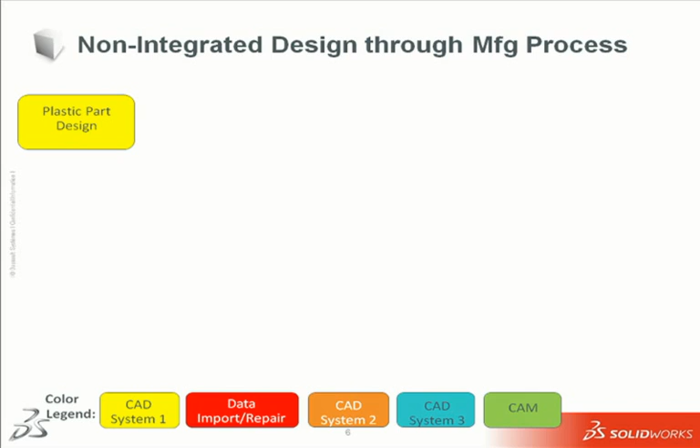So first, let's say we have a certain CAD system. We start off with a plastic part, and then we want to send it to our tooling vendor, or maybe even within our own company we're using a different CAD system to do the mold design portion. So typically what I have to do is export, then import, and probably even repair some of that geometry.

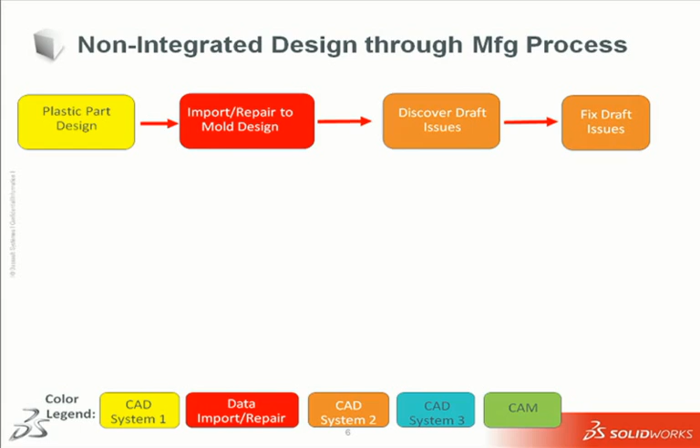That goes into my mold design system, and I find some draft errors there. I maybe fix those draft issues, maybe do some mold inserts. And then when I go to do my drawings, I might actually go to another CAD system, so there again I might export and re-import. And then when I go to CAM, I might go to another CAM system outside of the one I have now.

And you see along the process you have all these red boxes, and these are really places that you're stopping. You have to do something that you really don't want to do: export, import, and sometimes repair your geometry.

So what happens now when a design change comes along? Well, unfortunately, you have to start the whole process over again. You have to import the data into your mold system, import it into your drawing system, import it into your CAM system. This takes a lot of time and creates barriers. Secondly, it puts the accuracy of your geometry in jeopardy. Thirdly, it thwarts concurrent design.

In other words, you're not able to work on the model, work on your NC toolpaths, work on the mold, and work on the drawing all at the same time. Fourth, it's extremely time-consuming. There was a study done a while back by a consulting company that basically said about 70% of the time designing, actually working in the CAD system—in this case the mold design process—people were spending doing this import and repair of data.

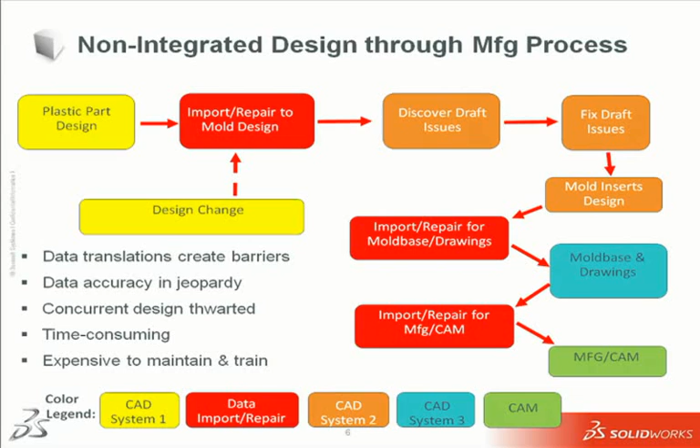So imagine if all your systems could talk to each other seamlessly, how much time you could save. The other thing is it's expensive to maintain and train people on multiple systems. You have maintenance dollars to pay, and you have training to get people up to speed. So that's a big pain also.

So let's look at another way you could do the same design process. I call this the integrated design through manufacturing process.

In this process, you have the same design points: plastic part design, discover draft issues, make the mold, mold inserts, maybe even some analysis, CAM operations, NC toolpaths. But in this situation, all of these phases talk to each other, and there's no need for translation of data.

Data translations are eliminated, which means barriers are eliminated. You don't have to worry about tossing your design over the fence, as they say. Data accuracy is maintained because you don't have to worry about somebody taking your geometry and by accident messing it up a little bit and making a mistake.

Third, concurrent design is promoted. You can be working on your part design while somebody's working on the NC toolpath. You don't have to wait until the design is frozen. I hear that a lot out there: I can't start my NC toolpath until my design is frozen.

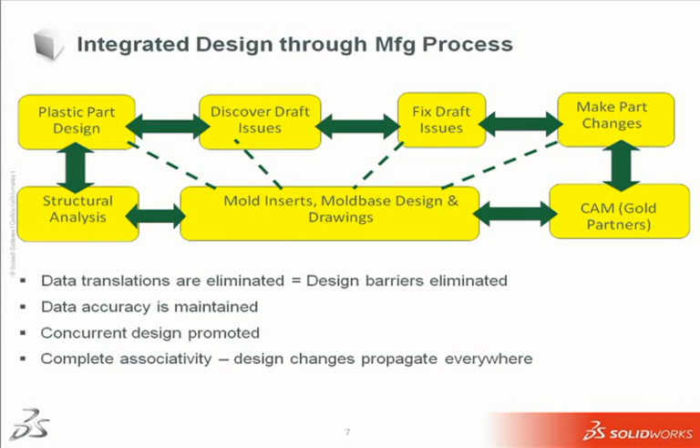The other benefit is complete associativity is maintained everywhere, so you never have to worry about who owns the newest model. Because the design model is the base of everything, it's the master. And if it changes, everything else will update, and changes will propagate everywhere else.

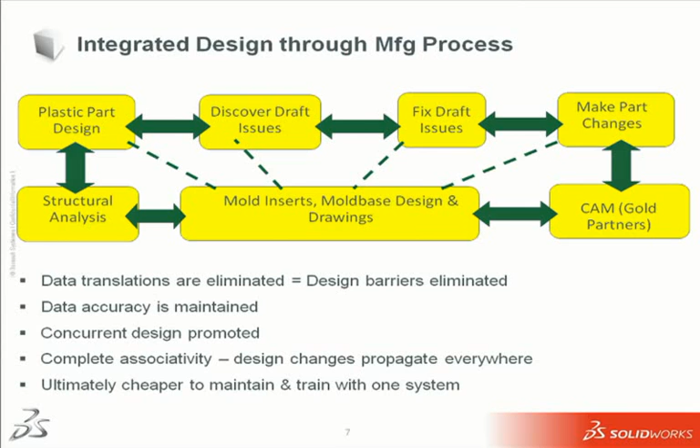Finally, and this is really key for a lot of people, ultimately it's cheaper to maintain and train in one system. You don't have to pay all the maintenance dollars, and it's easier to get people up to speed on one system—or in this case, one CAD system and one CAM system that are fully integrated, which keeps the UI very similar and allows you to transition between the two more easily.

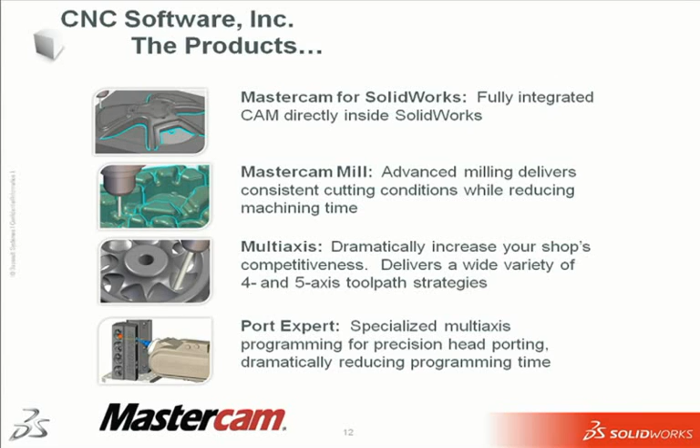Port Expert is a tool that specializes in programming for precision head porting machines.

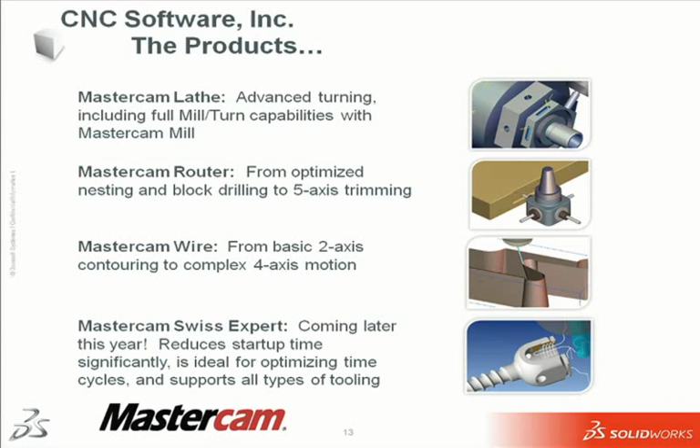We also have MasterCAM Lathe for turning. If you combine that with MasterCAM Mill, you can solve your mill turn needs. MasterCAM Router for woodworking, MasterCAM Wire for your wire needs. And coming soon, we have MasterCAM Swiss Expert for controlling and programming your Swiss CNC machines.

I want to show you two products today, MasterCAM for SolidWorks 2D and MasterCAM for SolidWorks 3D. The 2D version works in both part and assembly mode, contains traditional 2D toolpaths and our more advanced high-speed toolpaths. We also have FBM, or feature-based machining, and those capabilities allow the program to automatically scan your part and identify the features to cut, and then automatically program your part.

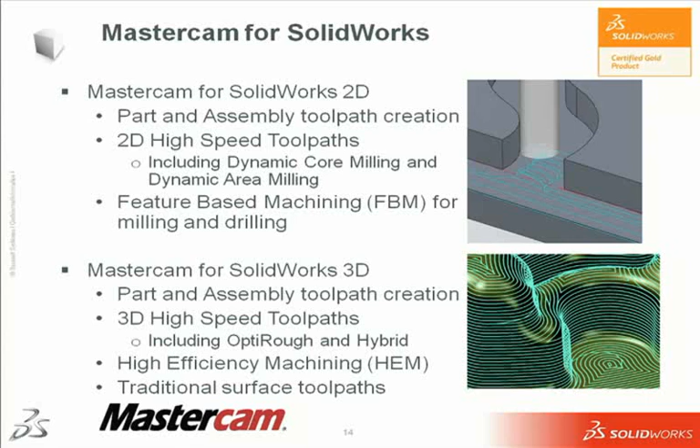The 3D version includes everything in the 2D version, plus our 3D toolpaths. These toolpaths include our traditional toolpaths as well as our high-speed surface toolpaths, including OptiRough, Hybrid, and HEM, and I'll be showing those to you guys shortly.

I want to briefly discuss some of our toolpath technology before we see it in action. One of them that I want to show is OptiRough. It's one of our latest toolpath additions, and instead of using a traditional approach to material removal, where we take...

...a small step down, remove material, and then continue with another small step down, OptiRough takes a large step down, sometimes up to 150% the diameter of your cutter or more, and then uses a dynamic tool motion to remove material. By automatically adjusting the step over, you have a more consistent load on your cutter. Your cutter lasts longer, it cuts deeper, and it removes more material faster.

Once the cutter approaches a tapered wall, our optional step up settings will create smaller steps upward to remove material from the tapered walls. Once that's done, the whole cycle repeats itself. The tool does another large step down, removes material, and then a smaller series of step ups.

Our HEM technology, or high efficiency machining, includes a proprietary speeds and feeds calculator developed by ISCAR. It's a partnership that combines, in my opinion, the best of both worlds. I look at it this way: MasterCAM focuses on creating state-of-the-art toolpath motion, and ISCAR focuses on developing new tools with advanced cutting technologies.

Now with this integration, the two technologies are partnering to work better together. When they're used properly, you can take full advantage of what they were intended for. We often see CAM users that don't take advantage of the full potential of these technologies. With this technology enabled, HEM will dial in a specific spindle speed, matched precisely with an optimal feed rate for what I consider really a no-fail approach to machining. We've just been seeing really great results with it. So I'm going to show that to you as well.

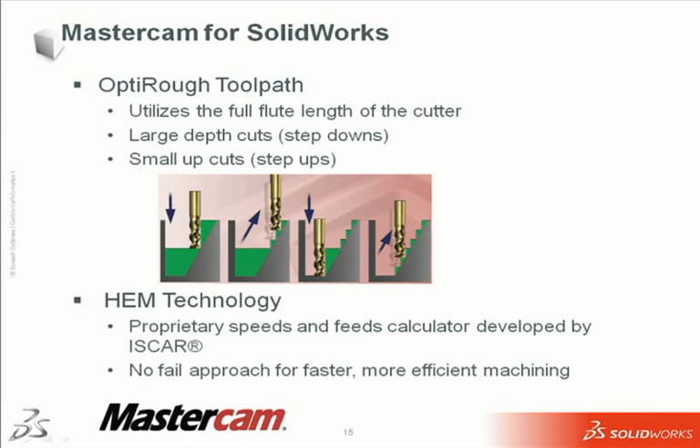Now, Craig, at this point, you want to switch the control over to me?

Okay, let's switch this over. Okay, so it looks like you guys can see my screen now.

I'm going to start with a 2D demo. The first thing I want to do here is create a toolpath called a dynamic core mill toolpath. It's a high-speed toolpath, and this toolpath allows me to enter my part from the outside as opposed to ramping, helixing, or plunging into my part.

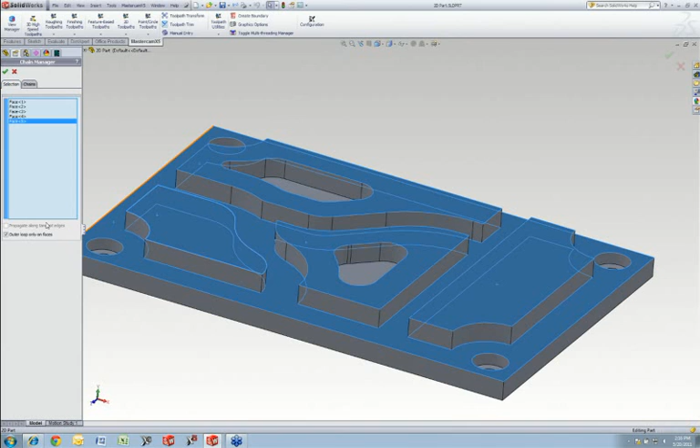I'm just going to go up here and activate one of the toolpaths. I'm going to select the faces that I want to machine as well as the faces that I want to avoid, so I can avoid islands and so forth. The nice thing here is I'm not just limited to selecting solid entities. I can also select surfaces, edges, even sketch geometry for the control of my tools.

I'm going to choose a dynamic core mill toolpath, and I'll just grab a cutter here, 1/4 inch is fine, and I'll accept the defaults. At this time, MasterCAM for SolidWorks will calculate my toolpath, and when I'm done, I can investigate this. Let's zoom out a little bit, and we'll play this to see what it looks like.

Notice how the tool enters from outside and dynamically changes the step over to create a more constant load on the cutter. When it gets into these channels, it again does more of a constant dynamic motion to really optimize your material removal rate. This also utilizes the entire flute length of the cutter, and it extends the tool life greatly.

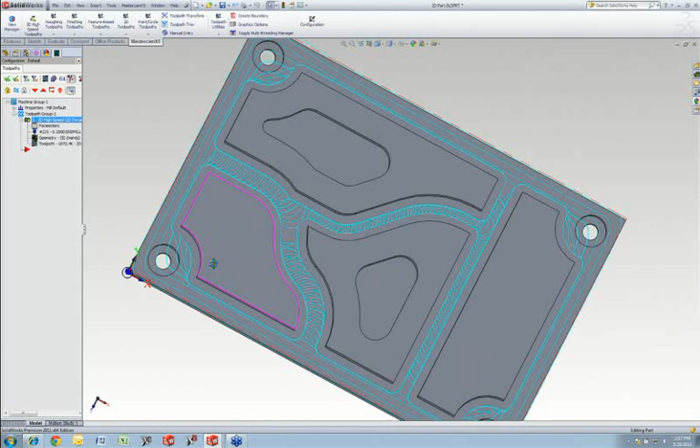One key thing to mention: everybody sees the screen, and you notice you're inside SolidWorks right now. That's one of the key things, the fact that we're running MasterCAM for SolidWorks, not just MasterCAM. Keith has full access to all the SolidWorks capabilities as well as the MasterCAM for SolidWorks capabilities.

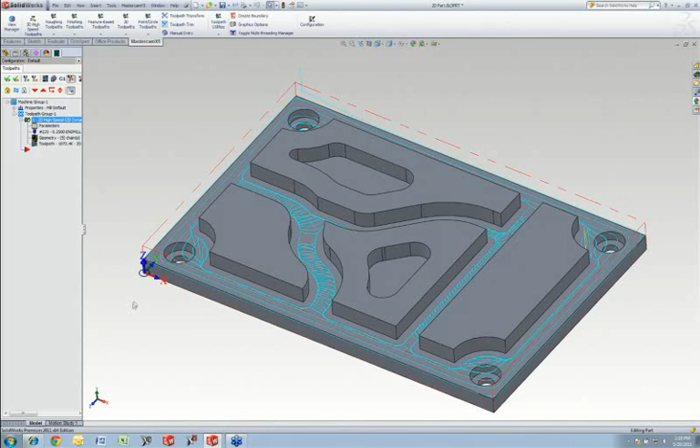That brings up a good point. The toolpaths are not specific toolpaths we've developed for SolidWorks. They are 27, 28 years of proven toolpath technology inside of MasterCAM that has now been able to be accessed through SolidWorks.

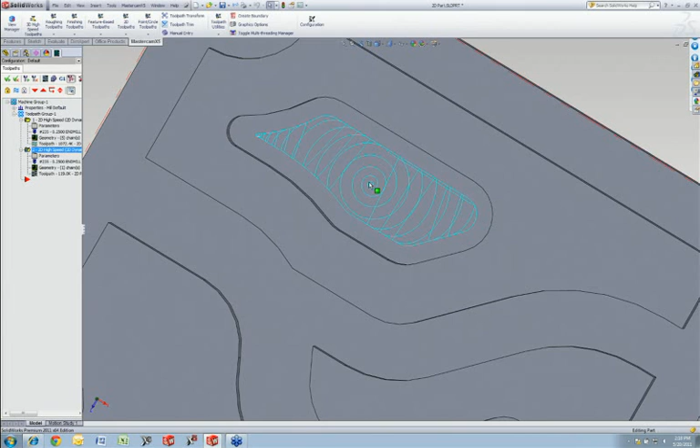So if I wanted to continue, maybe I want to machine out this little island up here, I'm going to use another toolpath called an area mill toolpath. I select the geometry I want to cut, choose the type of toolpath I want, click OK, and within a short amount of time it's done. Notice, again, we don't have our traditional zigzag back and forth type of tool motion. We have this dynamic motion, which allows me to cut deeper and faster with my cutter.

Now, if I have a similar piece of geometry, let's say this island over here, I can just take an existing toolpath that seems to work well, copy it, paste it, and then associate new geometry with it. I look at it this way: if you program the geometry and it works, keep it, just apply it to new geometry. So within just a couple of clicks, I copied the toolpath and applied new geometry to it.

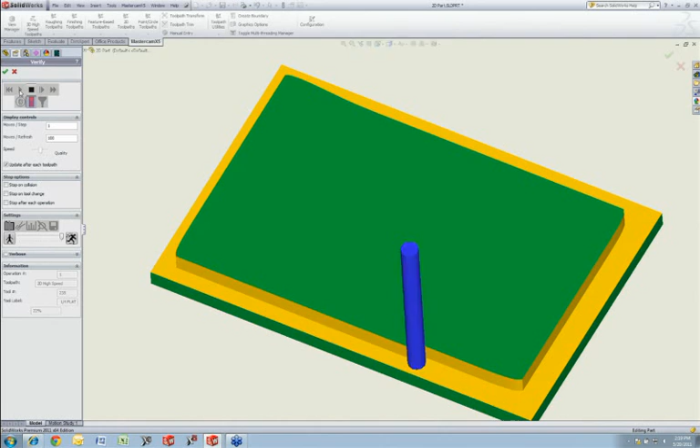At this point, what I want to do is turn on what's called verify. In this case, it'll allow me to check this model out and see how it's going to be cut. A really useful feature that brings the power of SolidWorks into the CAM world is my ability to compare my machined model in MasterCAM for SolidWorks to the digitally designed part that exists in SolidWorks.

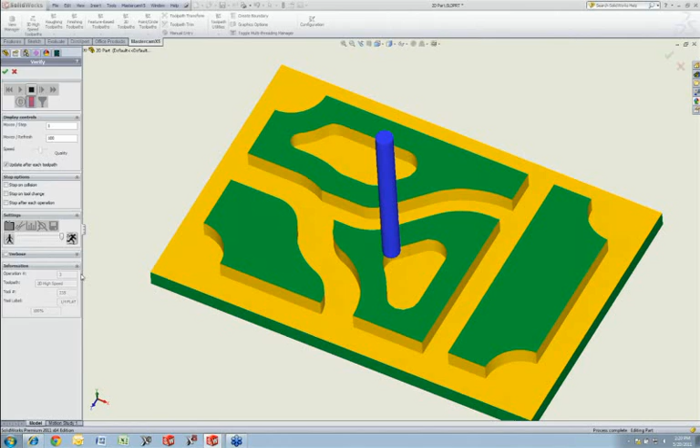Once this is done, I can choose this option to compare my machined model with the SolidWorks model, and I see a color code here. This is basically a color mapping to show how much material I'm leaving. In this case, we can see my machined model here, we can see my CAD model here, and then I can see an overlap of both. You'll see in the upper corner I have a blue area, which means I missed material there, probably because I used a larger cutter and couldn't get into that smaller area.

That brings up a good point. I can use the tools available inside SolidWorks to check for any minimum radius of curvature. A tool I use all the time is my check entity tool. I just choose the option to select the minimum radius of curvature, hit check. It identifies where the minimum radius is, and when I select it, it points out exactly to that area, showing me that my minimum radius of curvature is about 100 thousandths. So my quarter-inch cutter could not fit in there.

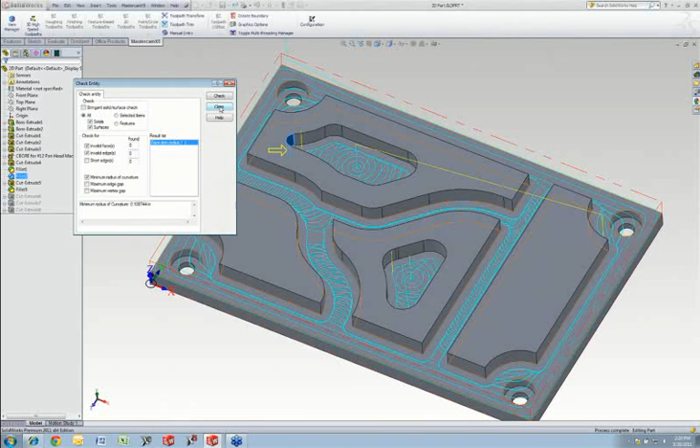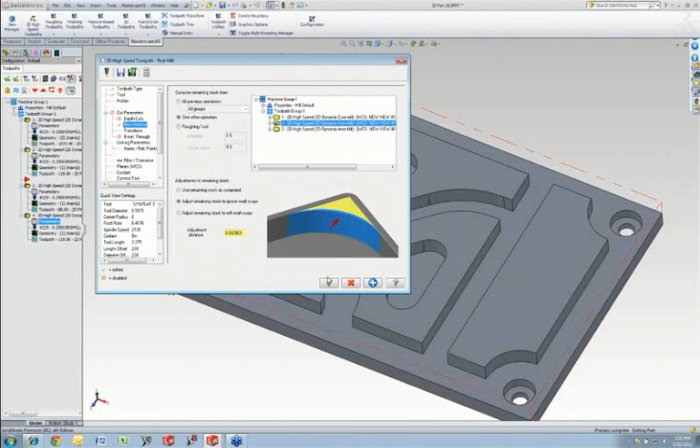So what I can do back inside MasterCAM for SolidWorks is take that toolpath that went into that area, copy it, and do a rest machining operation or rest milling operation on it. By copying that operation, I'm going to choose a rest mill toolpath instead, and I'll choose a smaller tool, in this case maybe a 3/16. Then under another parameter, I can tell it to look at a previous operation, and it'll calculate what material that previous operation missed. Now this new toolpath will only machine that remaining material that was left behind.

So what we can see here, if I zoom into this area, we have just a simple little tool motion that cleans out that area. I could also use dynamic rest milling instead if I wanted a more dynamic approach to it. A lot of that would also depend on the type of material I'm using.

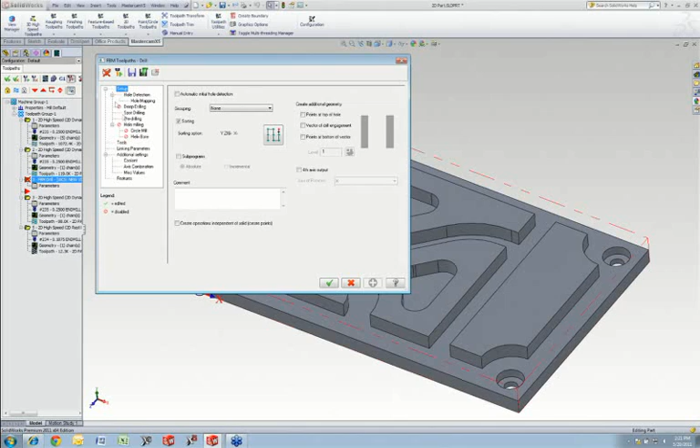Let's finish up this part. We'll drill out the holes. In that case, I'm going to use FBM, feature-based machining, specifically the drill capabilities of it. What that allows me to do is have FBM analyze my model, look for islands, pockets, holes, anything I can machine, and automatically apply toolpaths to that based on some rules that I give it.

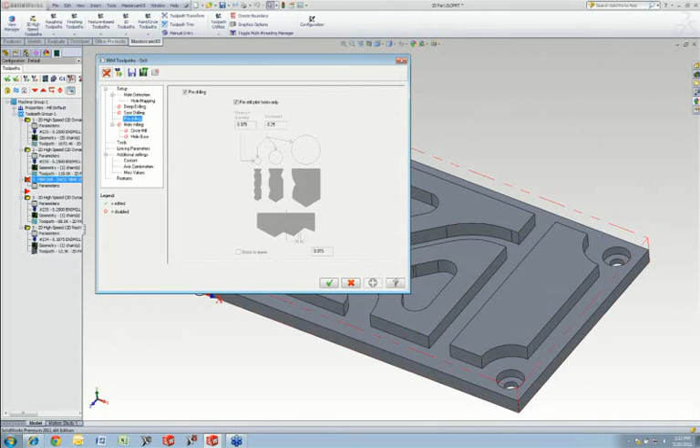Let me turn off spot drilling. I don't need that, I'll just do some pre-drilling. I can also just tell SolidWorks to detect the holes. What it will do is identify any hole wizard features that I have, and with those hole wizard features, it'll actually grab the intelligence of that feature. If it was a 1/4-20 tapped hole, it'll identify it in FBM and allow me to automatically program that with the appropriate size drill. So I just click OK, and I have my drill toolpath already created.

When I hit play here, let me speed it up a little bit. It goes through and machines all these holes out automatically.

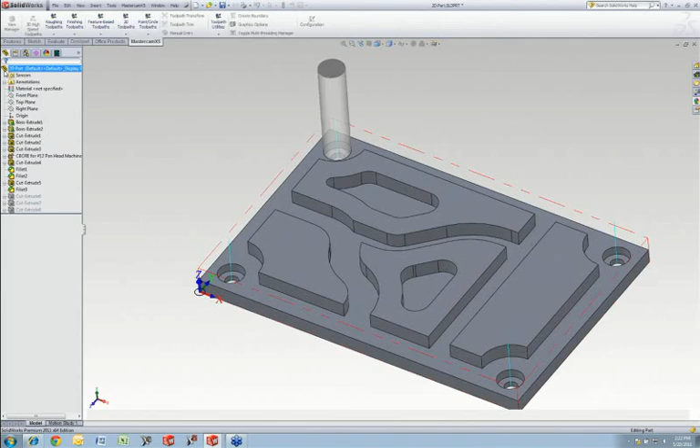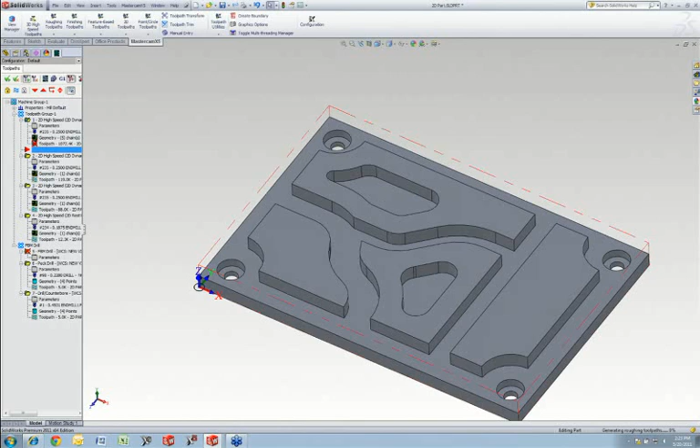Just to take this one last step before we move on, let's throw a simple design change at this. We have a channel here. I'm going to change the location of this channel. Right now it's 1 1/4 inches off the wall, I'll change it to 1.4 inches and rebuild my model. So what MasterCAM for SolidWorks will do is identify the geometry affected by this design change and mark my toolpath dirty. Any toolpath affected by that design change will be marked dirty, and all I have to do is regenerate my model, and my toolpath automatically gets updated.

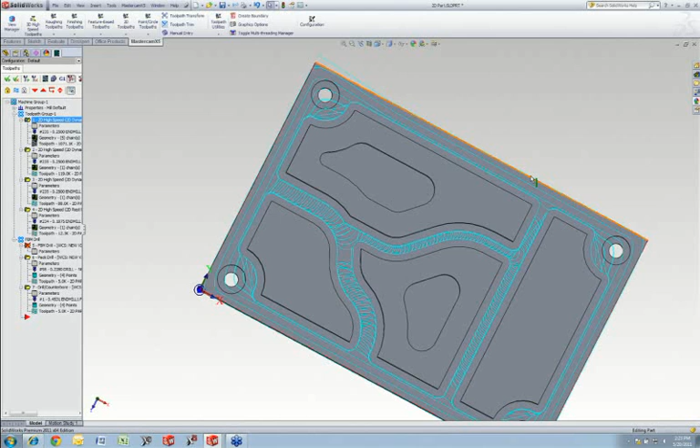So even though this was a pretty simple example, and we'll get into a more complex one in a minute, this is really key. With the benefits of an integrated CAD/CAM system like Mastercam for SolidWorks, your design change doesn't stop you in your tracks. And I think Dan is going to allude to this a little more when he talks in a few minutes.

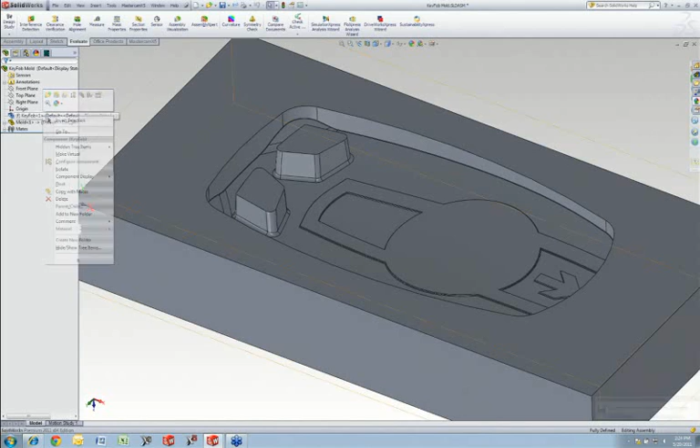So let me switch to another model here. This one's a little more advanced. In this case, I have an assembly. A unique thing with Mastercam for SolidWorks is the ability to program in the part mode or the assembly mode. In this case, this is an assembly, it's a mold, and if I isolate the parts, which the isolate command is a function I love, it's great. This is the model that my mold was created from - it's just a key fob for a car ignition.

Let me jump back out of isolation mode, and I'm going to open up this model in its own window - the mold model. You'll notice I already have some toolpaths on it, just to save time, but I want to go through and look at these specifically. This first toolpath is an OptiRough toolpath.

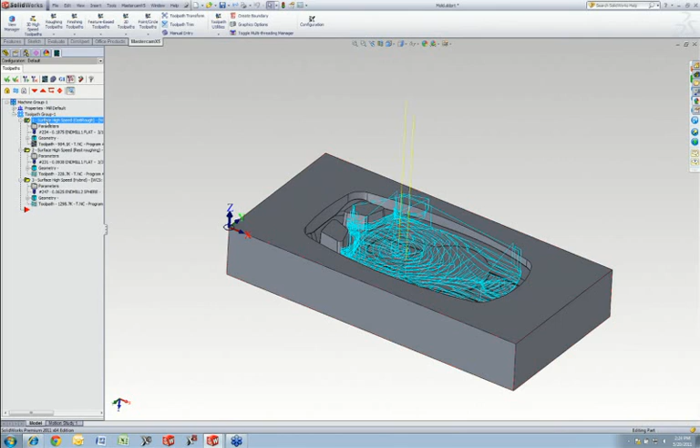I alluded to that earlier - the OptiRough toolpath allows me to do large step downs and then smaller step ups. If I go into the parameters of my OptiRough toolpath, you'll notice I have a step over option, a step down option, and an optional step up command. Right now I'm doing about 55% of my cutter in depth, and really that's just because this is a fairly small part and I want to see multiple depth cuts. But I could, in some material, go up to 150% or more.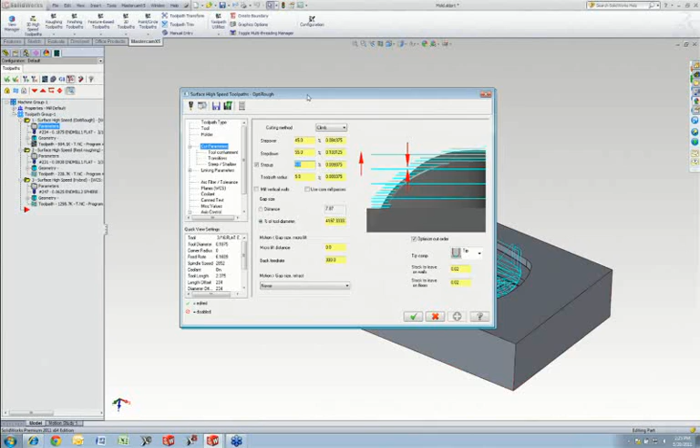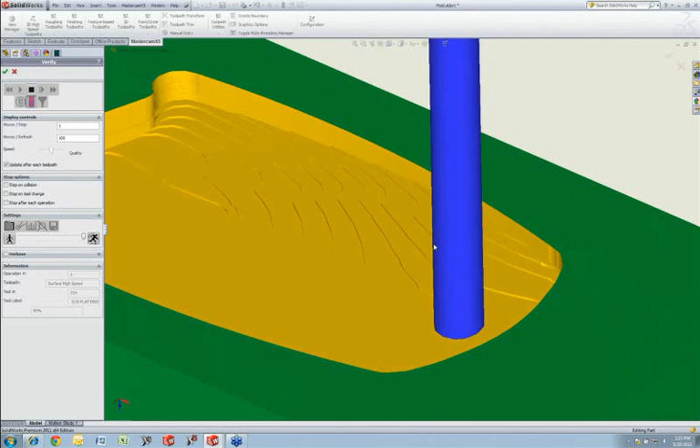So if we go in and do a solid verification of this, we'll see that my cutter removes as much material as possible and then does optional step-ups, which is key. If I zoom in here, you'll see it does optional step-ups in the areas where there's a tapered wall. If I wanted to use a more traditional machining approach, I would be doing Z-level cutting at every step down - every little flat area you see there, I would be removing material.

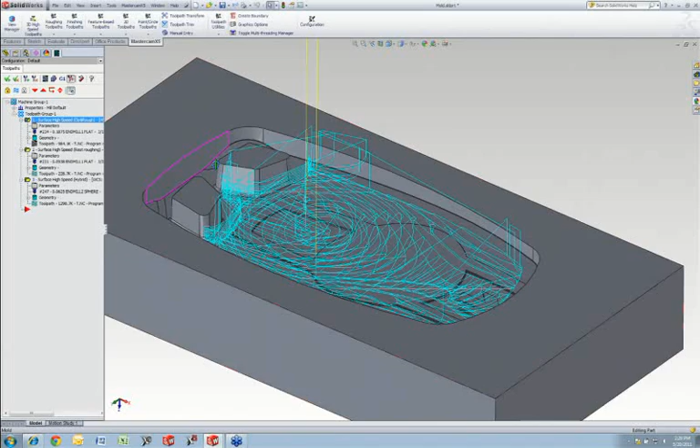Okay, so that was the first toolpath called OptiRough. Moving on to the second one - let's back up a little bit. You'll notice with the first one, I missed material over here, most likely because my cutter couldn't fit there. So using the benefits of a solid model and the power of MasterCAM, I can create a high-speed rest roughing toolpath, which allows me to remove material that previous toolpaths simply missed.

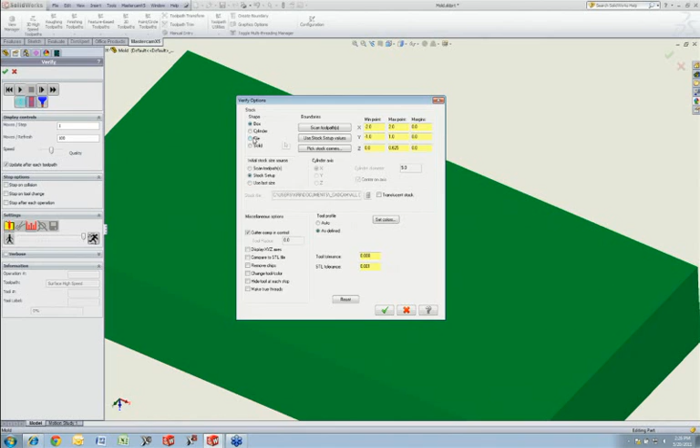Let me turn off that compare option, we don't need that anymore. I'm just going to bring up a stock so we can see a better example of this. If I play this, you'll see this cutter is only removing material that the previous toolpath missed. In this case I'm cutting very little air - I'm just attacking the material that's remaining.

And then the third toolpath I wanted to show here is our hybrid toolpath, and this is probably one of my best toolpaths. It's a combination of two toolpaths - a waterline or constant Z-level machine toolpath and a constant scallop toolpath.

So a waterline toolpath is great in vertical or near vertical walls. But on a more flat area, that waterline toolpath loses its power because now you have large step downs in an area where you really need to minimize the step down. So at that point, the intelligence of our toolpath automatically switches between waterline and constant scallop toolpath.

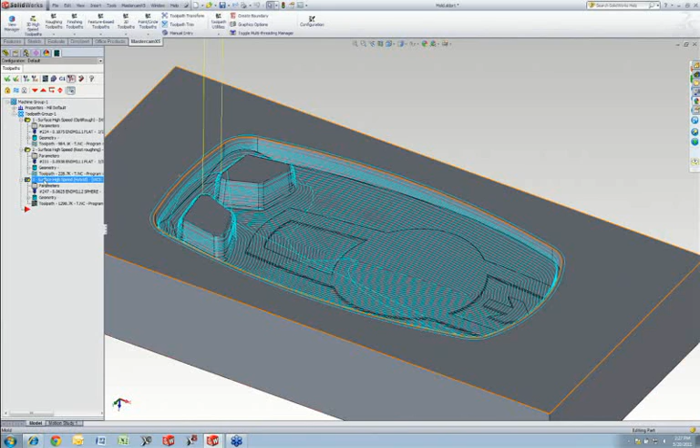And we can see this. If we go into my verify again, I'm just going to change my stock so we can look at a better example of it here. We'll see that, let me slow this down just a little bit.

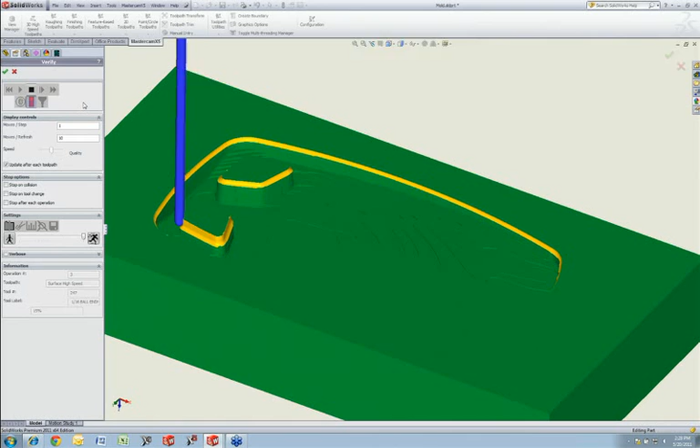We'll see that we'll do constant Z-level machining or waterline machining around the vertical walls. But then as it slowly starts to taper towards the center of this model, it's going to actually convert over to a constant scallop toolpath. Maybe this was a little too slow. We'll speed it up there.

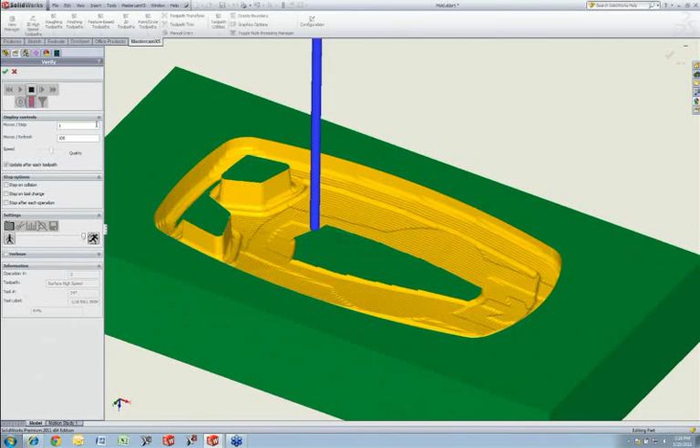So we'll see that as this toolpath is collapsing towards the middle, it'll slowly morph from constant Z-level machining to a constant scallop machining, because right in this area that is cutting now, if I was doing Z-level machining, I'd see some pretty big step downs. Okay.

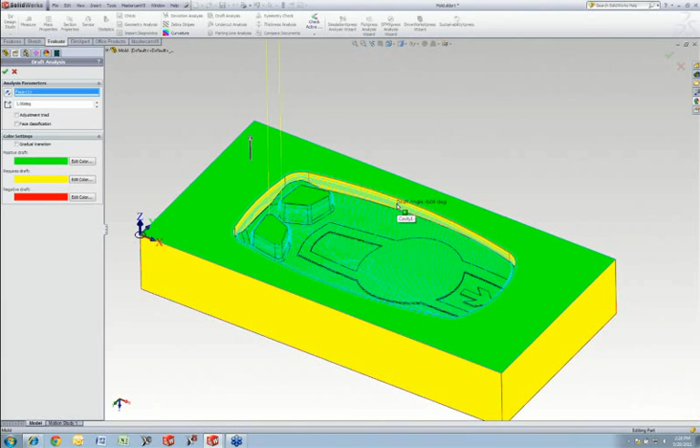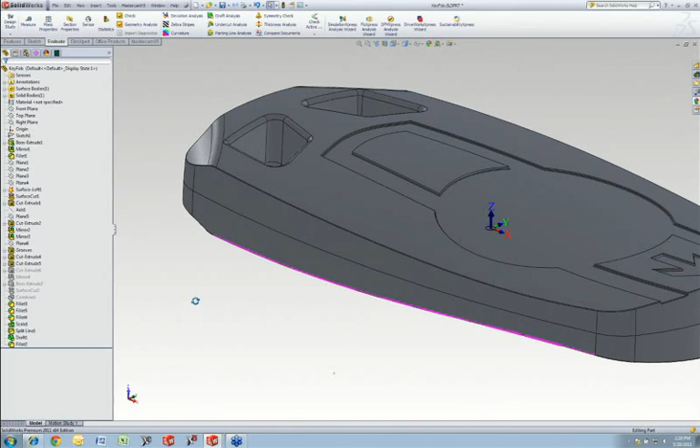So what I'm going to do is switch back to my assembly, and I'm going to open up my part that the assembly utilizes to make the mold. In this case, it's my key fob part. And in here, I have a draft feature that's suppressed. I'm just going to unsuppress it for the sake of time. But what this feature is doing, the draft feature, is it's just adding draft to any area above this parting line. So my faces here that are selected, that's where it's adding draft to.

And if I go in, save that down, close my model, I get this message that we always see inside of SolidWorks. It's going to update my assembly, and that's perfectly fine. That's what I wanted to do. So now it updated my assembly, and then from there, if I go back to my mold, what MasterCAM for SolidWorks will do is it looks at my model and identifies areas that the geometry changed.

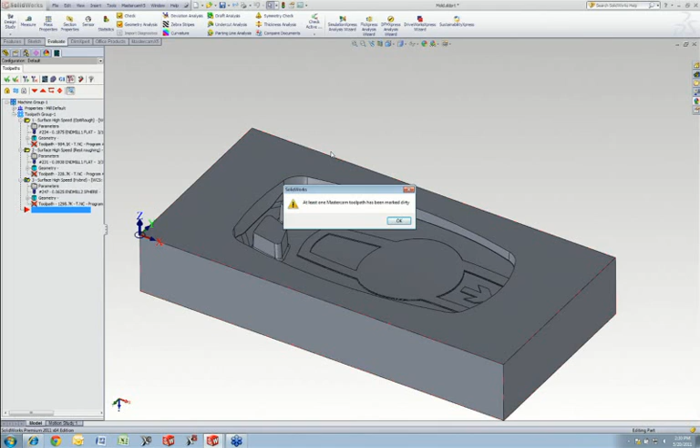I'm seeing a little bit of flickering on my screen, I think it happens to be my GoToMeeting here. But what's happening is MasterCAM for SolidWorks is looking at the geometry, identifying areas that were changed, and it's marking those toolpaths dirty. So any toolpath that is cutting a surface that changed, it marks it dirty.

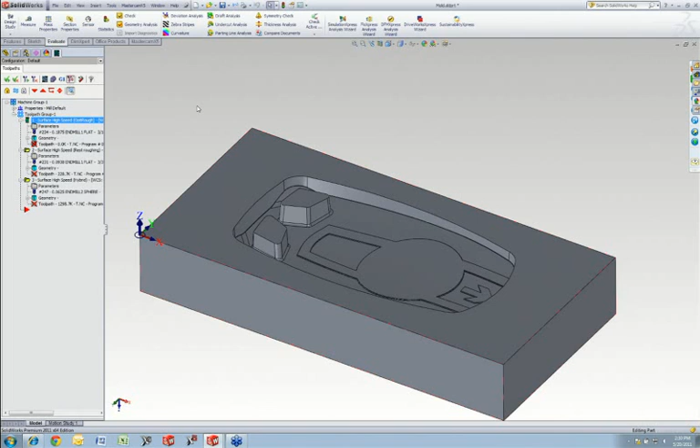So at this point, all I need to do is select my toolpath that I want to rebuild, click on the Rebuild button. MasterCAM for SolidWorks will recalculate that toolpath. Now, this is, in my opinion, this is huge. With the benefit of an integrated system, like I mentioned earlier, a design change doesn't stop you dead in your tracks. All you do is you make a simple change to your model, your toolpath updates.

And at this point, I can go back into Verify it, I can go back into Backplot it. I'm no longer limited by a design change. I don't have to stop and reassociate my toolpaths. I just click a button and go.

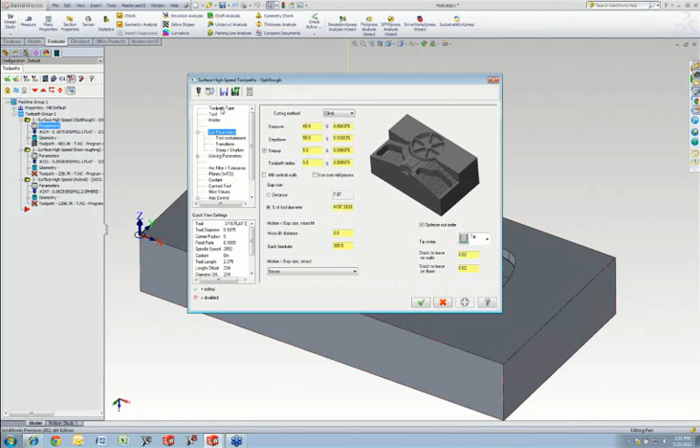And one last thing, I realized I had not mentioned this earlier. I talked about HEM briefly. What that is, the high efficiency machining, it gives me the ability, like I said, to select a tool and my feed rates automatically are dialed in precisely. I just want to kind of show you that interface here because I skipped that earlier.

So we have a whole list of tool libraries to choose from. If I grab, for example, my ISCAR inch library, and I just grab a small cutter, it'll identify that this is an ISCAR tool, and it allows me to turn on the HEM. And with HEM turned on, I can use the slider bar left or right. And as I drag it left or right, you'll see my feed rate and my spindle speed are automatically dialed in and grayed out, and I can't update that.

The interesting thing, too, is if I go too aggressive, I hit the maximum limit of my machine, and it even tells me that. It says your machine is now limited. You can't go faster than what you're putting in here. So that's really the power of the partnership that we have with ISCAR, and then obviously combined with the partnership that we have with SolidWorks.

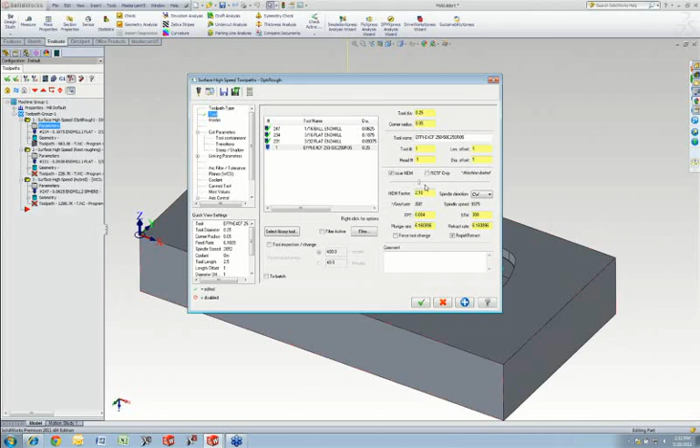This is just an awesome set of tools that we can use to machine all of our parts. So at this point, Craig, I'm going to pass it on back to you.

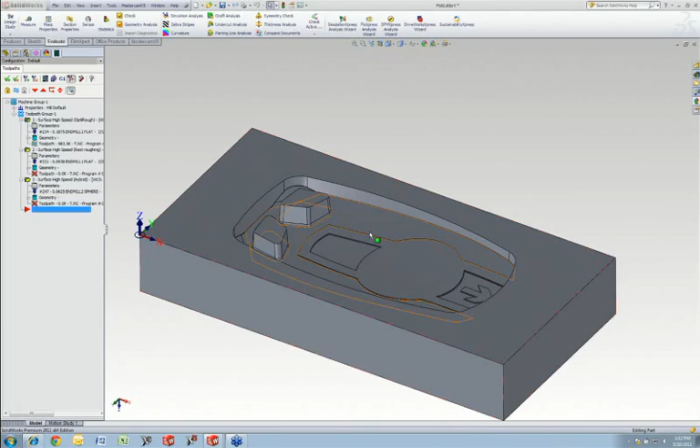Sounds good. So Keith, I just want to emphasize, and you did a great job there. You know, how many times when you're doing mold design or any kind of design where you're dependent, really dependent on a designer to constantly make the changes for you, or it's in another system where you have to go, hey, can you change that part for me in that other system? The fact that everything's fully integrated here, you can just instantly jump back, especially in mold design. You're constantly changing things like radii and drafts and things like that so that you can actually machine the molds.

And to have all that power in one system, basically one fully integrated system where you've got the power of MasterCAM and you've got the power of SolidWorks all in one area. I mean, it lets you just jump back and forth seamlessly.

And you know, as you were going through that, Keith, I was even getting lost. Seriously, are you in SolidWorks now, or are you in MasterCAM? You can't tell because they're so similar that you really have to look to see what you're in. And that's, I think, one of the most powerful things, that you guys have done such a great job of integrating your products inside of SolidWorks too. It's very seamless, and it really shows up in a demo like this.

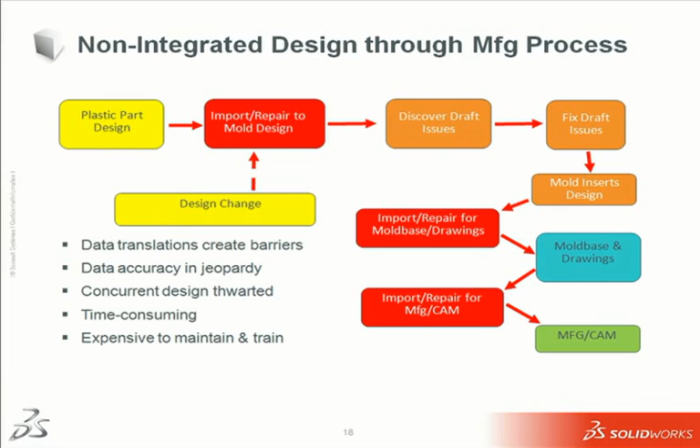We have to be able to import those changes and make it all associative. Maybe it's a change on an electrode out on the floor. Maybe it's a change on some high-speed machining out on the floor. But we have to get that in there and get it quickly in the system to all of the guys that happen to be working or associated with that particular tool or that particular cavity block or core block that they might be working on.

The time savings here is tremendous. You will have less mistakes. We don't have mistakes like we did years ago where a guy might change something on one system, but it doesn't get updated in the toolpath and they miss it. Now, everything is together and associative, so that's a huge, huge point.

Ultimately, it's cheaper to maintain and train people as well. Now, we've been using MasterCAM for a number of years. A lot of the junior colleges teach MasterCAM, and a lot teach SolidWorks. From a business owner's aspect, it is phenomenal that I can hire a guy off the street that knows MasterCAM or SolidWorks and easily show them this integrated system, and they pick it up.

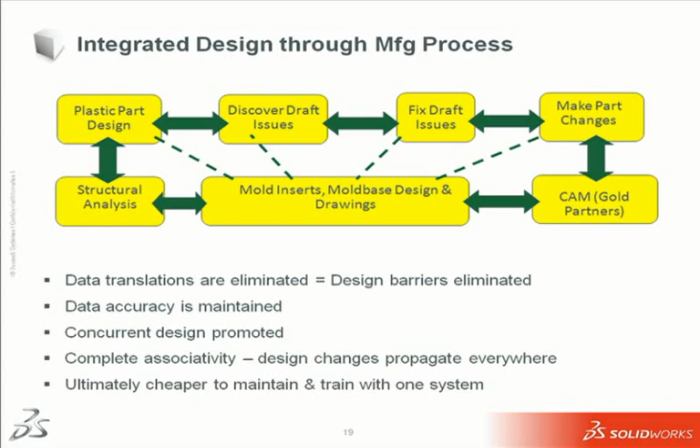The other thing I want to note is the paperless mold design and manufacturing. We, as prototypers, years ago would create prints and whatnot. Now we still have to create prints, but typically it's only for reference. A customer may want the tool design, for example, which we still create out of SolidWorks, but typically for the manufacturing process on the floor, a lot of prints have been eliminated.

The big difference here is when we design a tool, we design it in solids. We're initially creating electrodes and toolpaths at the design level before it even hits the floor. So we're already determining in one step how we're going to build this mold from start to finish. So when it gets out on the floor, it goes to the tool maker, gets broke apart, and the pieces go to the machining center, the wire cutter, the EDM. Everything is broke apart, the path is already chosen, and MasterCAM for SolidWorks makes that easy because everything is chosen at that design level.

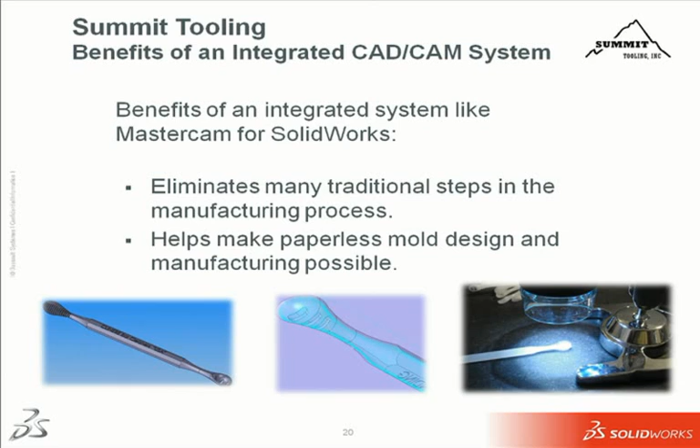Yeah, shorter lead times, absolutely. We have better control of it. A lot of times in a prototype field we have to make multiple changes to a part while it's under construction, not knowing which of those changes is going to make the customer's part fit and function the way they want it to. Sometimes changes will be taken out or put back in, and once those changes are done, everything is associative, so the final mold design that goes out of here is exactly how they want the production to be built. So a lot of times we'll take that and send it to the production mold builder, or perhaps sometimes that's even us, but it makes the job extremely easy.

The other factor I want to stress is that 50% bump in productivity is real. I would say since 08, our profitability has skyrocketed beyond belief, and I would say we're probably at a 50% productivity level. It has just increased phenomenally. I don't know how to put it into words, but other than that statement, yeah, 08 was a tough year for all of us. Coming up to where we're at today, I know a lot of businesses are doing quite well, but this is a tool that will change your whole methodology.

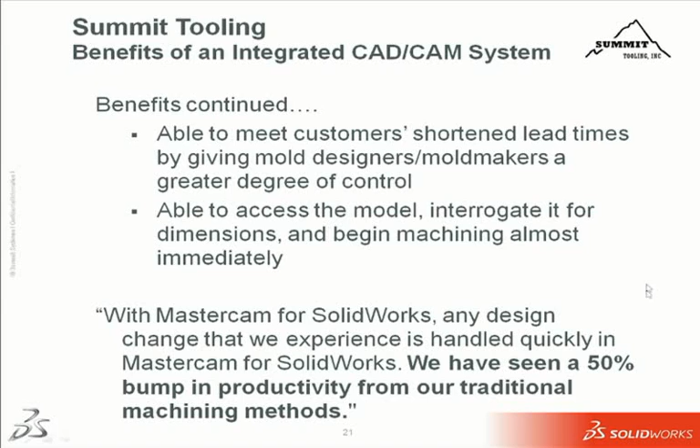Going along with the comments Dan had made, I wanted to add two quick case studies about our ISCAR partnership. One was a customer using a pre-hardened PCS mold base - their original programming time, which was pretty decent, was an hour and 15 minutes. They chose an ISCAR feed mill and used one of our dynamic motion toolpaths, knocking it down to 45 minutes. Then they turned on HEM and knocked it down to 15 minutes. With HEM there wasn't any guesswork - they clicked on the slider bar, chose what they were comfortable with, and everything else dialed in. They had a 5-to-1 productivity gain.

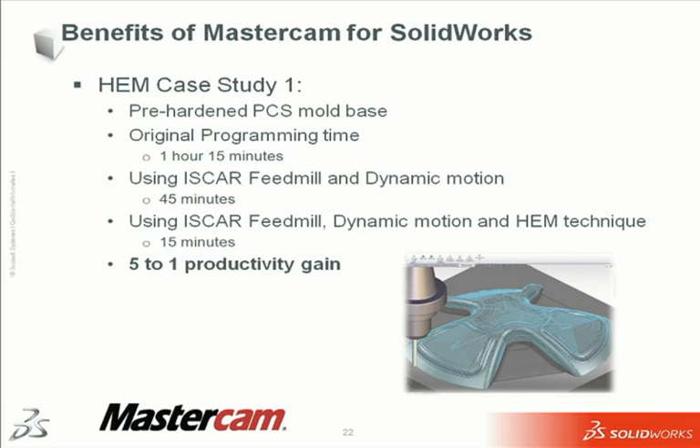Next slide. The other one was a customer with an aluminum mold. They looked at the mold and quoted 6 hours for the job, and finished it in 36 minutes. It was actually a complaint we got - the guy complained, kind of a funny complaint, that he couldn't get the chips removed fast enough and needed to upgrade to a higher speed chip auger. We actually have the email of that. It was pretty interesting, but it really shows the power behind it.

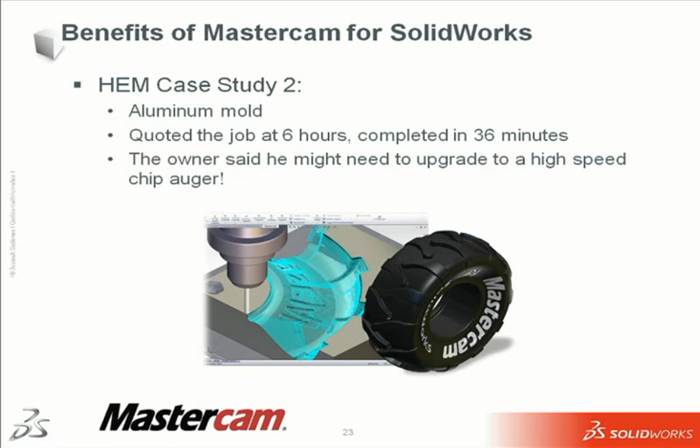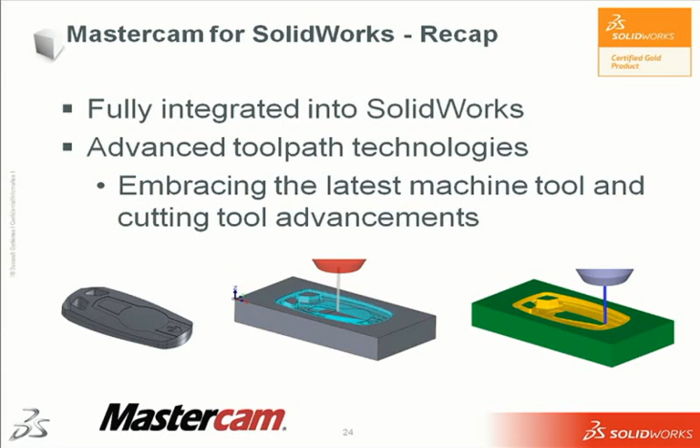So all these technologies coming together is just great. Next slide. Just to recap, we saw this fully integrated right inside of SolidWorks - programming with proven MasterCAM toolpaths right on the solid model, using our advanced toolpath technologies to really embrace the latest machine tool and cutting tool advancements, utilizing partnerships wherever we can.

Next slide. And we're supported by an experienced and very dedicated dealer network. Coming soon - people have been asking about our Multiaxis and our lathe and so forth, we have plans for all of that. We want to lay the groundwork and make sure it's powerful, strong, and stable. But you're looking at Multiaxis, Port Expert, Blade Expert lathe, all coming in SolidWorks down the line.

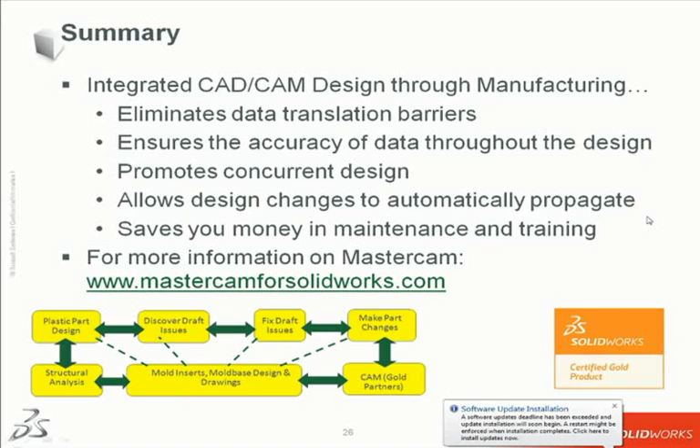This next question: does MasterCAM for SolidWorks provide some possibility to edit the toolpath directly from the modeling area, without having to modify the NC code? I'm thinking the answer would be yes, because if you modify the model—if you go directly into the model and make a change—you can say update the model, and immediately MasterCAM for SolidWorks will tell you the model's been changed, your NC toolpath is now dirty, meaning it needs to be updated. Then you can click update at that point and it will automatically update. Am I right on that, Keith? Right, we have a switch to automatically update it. It's a configurable switch for the user, just like in SolidWorks, if you have 10 modeling changes you want to rebuild after you're done—we have that ability as well. So modifying the model will certainly allow you to update your toolpath. Yep, so you do have that option.

Okay, so it's like somebody answered another person's question.

Will MasterCAM for SolidWorks, or can MasterCAM for SolidWorks, use older toolpaths written in regular MasterCAM? Yes, you can import toolpaths from older style MasterCAM. Also, if you have MasterCAM for SolidWorks and you're programming your SolidWorks part and creating toolpaths, you can open that SolidWorks file directly inside MasterCAM without going through translators, and bring in all the toolpaths you created. So this key file part, I could open up inside SolidWorks, all my toolpaths would be there, and I'd continue. I could open it inside MasterCAM, and all my toolpaths would be there, and I could continue machining it. So yes, we certainly can bring in toolpaths from MCX files from MasterCAM.